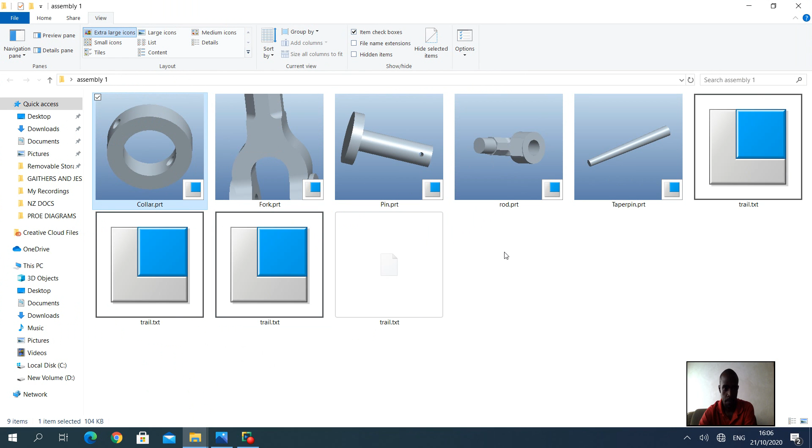We want to proceed with the final section of our machine assembly, the real machine assembly. What we actually covered before was part designing in machine assembly. I have made all the parts that make up my knuckle joint: the tapered pin, the rod, the pin, the fork, and the collar. They're going to be assembled together to make the knuckle joint.

So how are we going to be doing that? I'm going to be initializing my Proe together from scratch this time, because this is not going to be like what we did in part designing. Ignoring all the errors, you might be getting different errors to what I'm getting here, because I have not made my Proe the default software, but you can ignore them as long as you can open it.

So here we are not going to be doing part designing, we are going to be selecting assembly designing, checking the default template, selecting the last option, millimeters, like we did previously. Let me see. Yes, this one, ASM, that's for assembly, millimeters right there, and that's it.

So you are welcome to a similar window to what we had, but this is now machine assembly. You can also make parts in assembly, which is the top-down approach, but I'm going to be doing the bottom-up approach, whereby I've already made the parts previously. I just want to be able to combine or put them together using machine assembly concepts.

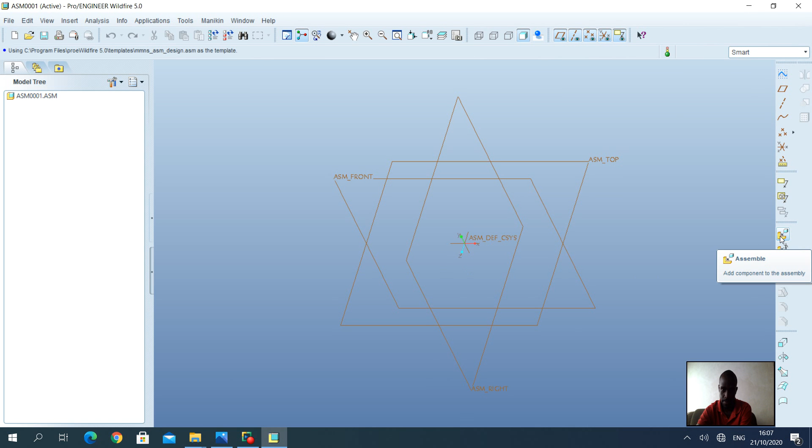The main tool we're going to be using is assemble, which is adding components into the assembly. I'm going to be selecting this to import the parts, going into my desktop and assembly 1. What am I going to start with? I think I'll start with the fork, then import the rod, then the pin, then the collar, and lastly the tapered pin.

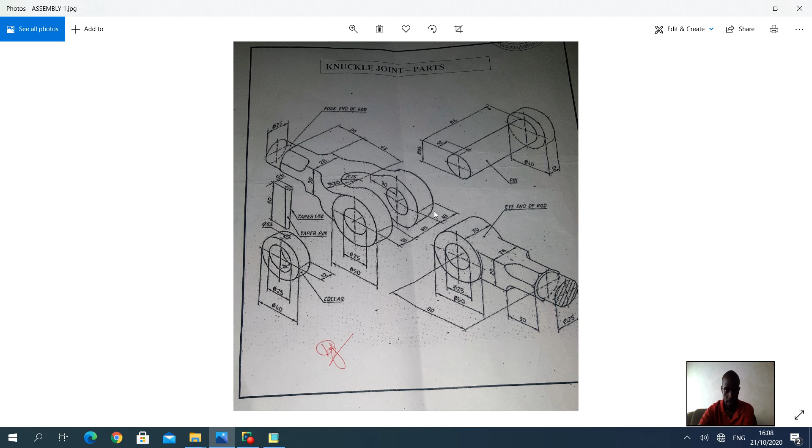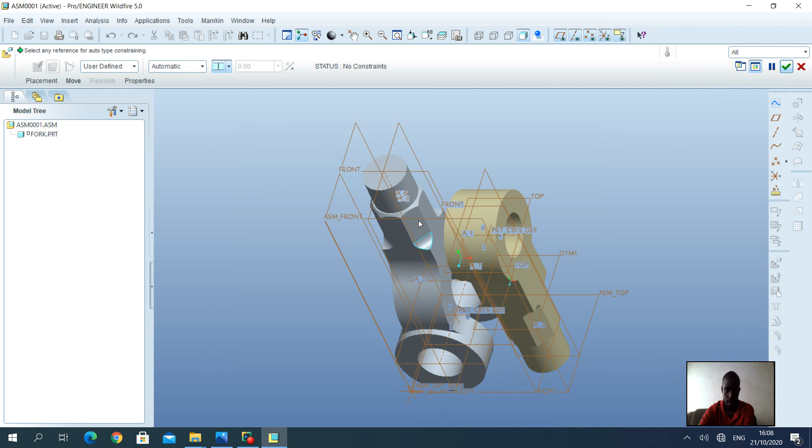So let me first import the fork into the assembly. The fork has been selected right there. I'm going to click done. Let me put another component, which is the rod. Where is the rod? There is the rod.

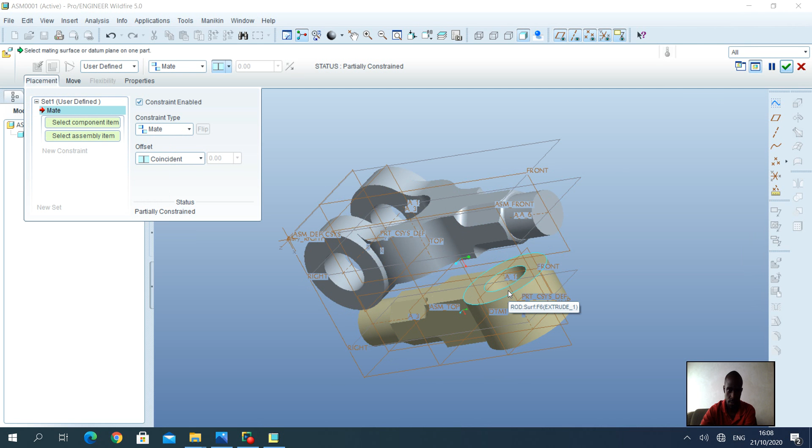But now I want to make sure that it is inserted into this assembly, so I am going to add some constraints. First of all, let me try to use the mate. The mate is joining two surfaces or faces together. I'm going to join this surface to that surface, yes, in that manner. Then I'm going to create another new constraint.

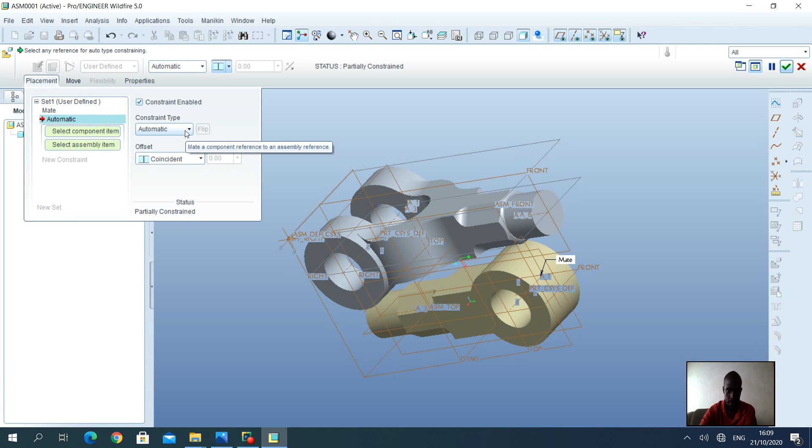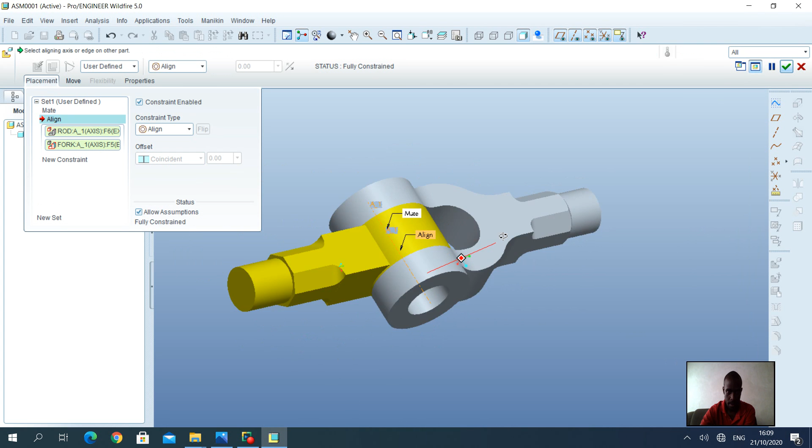This time it will be the align. Let me try to align these two components, or when we're aligning, we are putting two axes together, aligning different axes. So this axis to that axis. Yes, it has been properly aligned as expected. So I am done with the first part right there. Then I can click done. Okay, it's properly done, that's good.

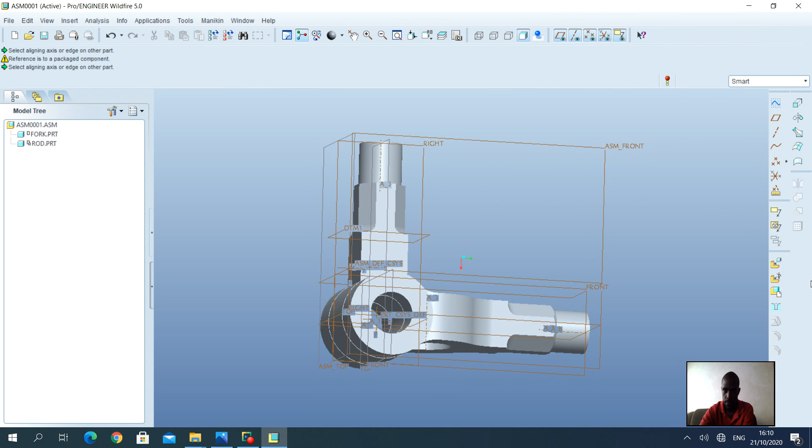So far so good. What are we going to be importing now? I think we're going to be importing the pin. So let's make the pin, let's import the pin into the assembly.

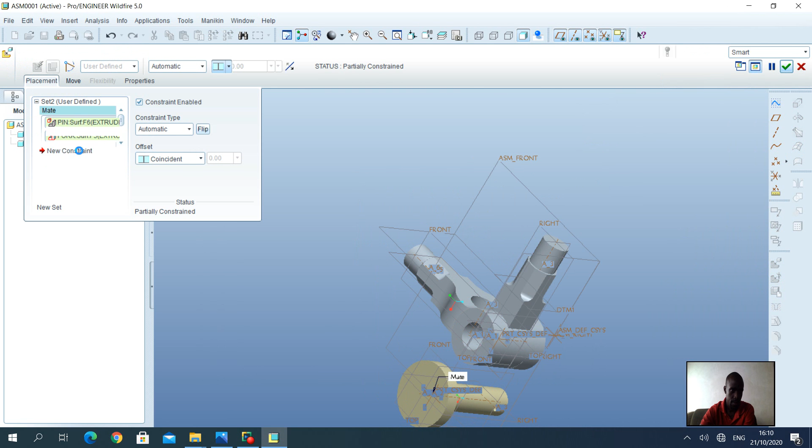So there is the pin. Let me try to mate this surface to this surface. Let me create a new constraint, which is the aligning. So whenever we're mating the surfaces, let me try to align these axes together. Yes, it has been inserted perfectly well, and that's it, we're done. We now need to import the collar.

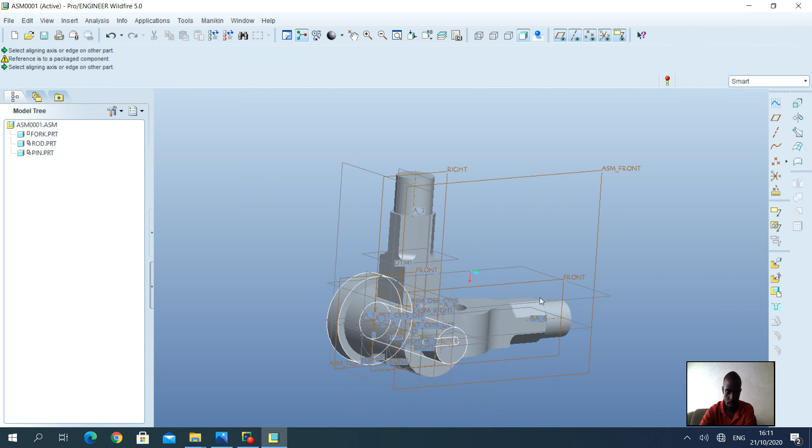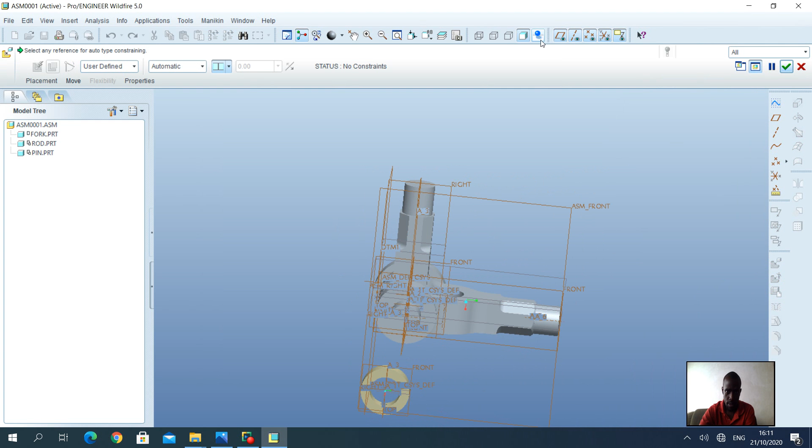Let's import the collar. So there is the collar. How are we going to be importing it? Let me check the axis. Let me try to turn off these planes because it's now less visible, for better clarity.

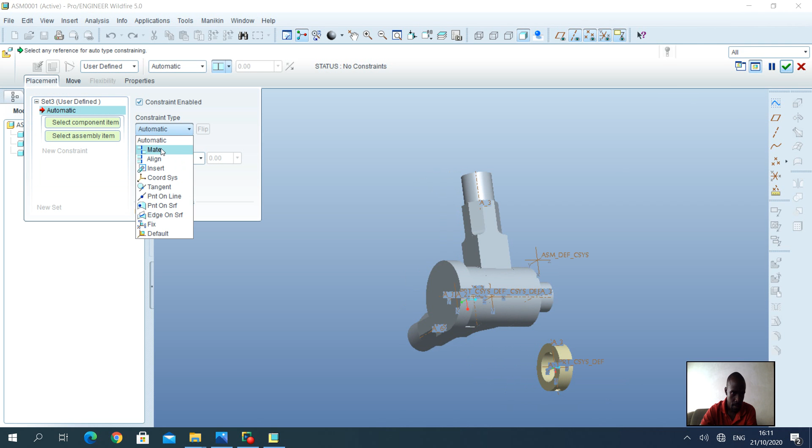So I am going to mate this surface. Let me make a constraint which is mate, this surface to this surface, and then create a new constraint, align. Mate and align, very important, to this axis right here. So that's it, but we don't have a through hole here.

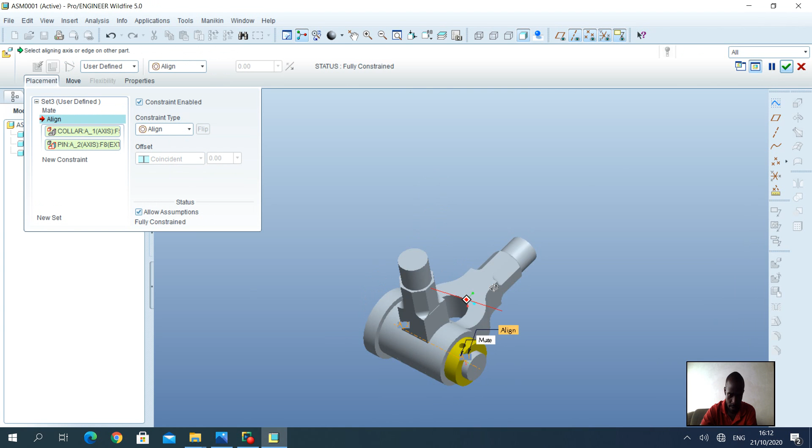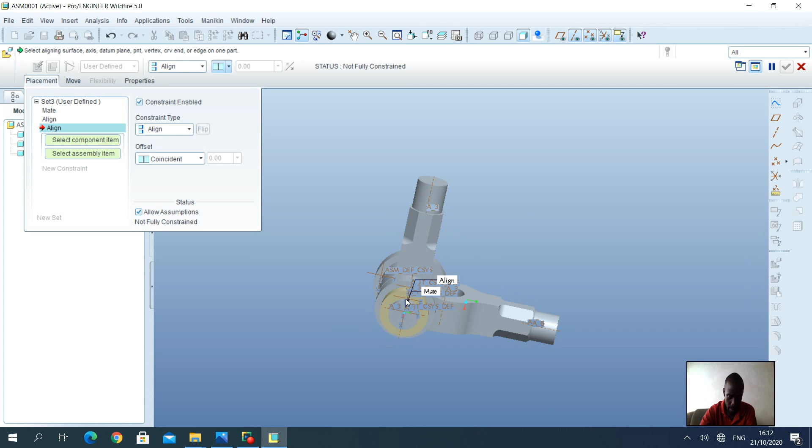So let me try to create another new constraint, which is align. I am going to be aligning A3 to this part. Yes, and now we've got a through hole. I think it has been done perfectly. Let me try to visualize if I have a through hole.

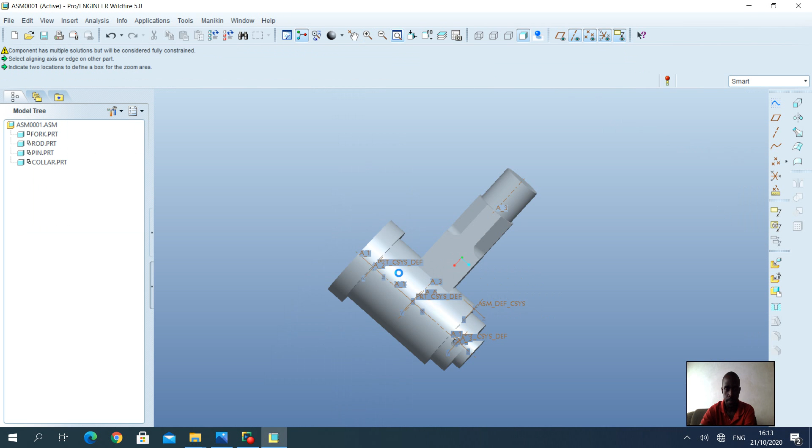Yes, I have got a through hole right there. Now the last thing is to insert the rod inside this hole, the tapered rod, the tapered pin actually. So let me see how best to insert it. I'm going to select another option, which is insert, and select the revolved surface which has been made previously, into this hole.

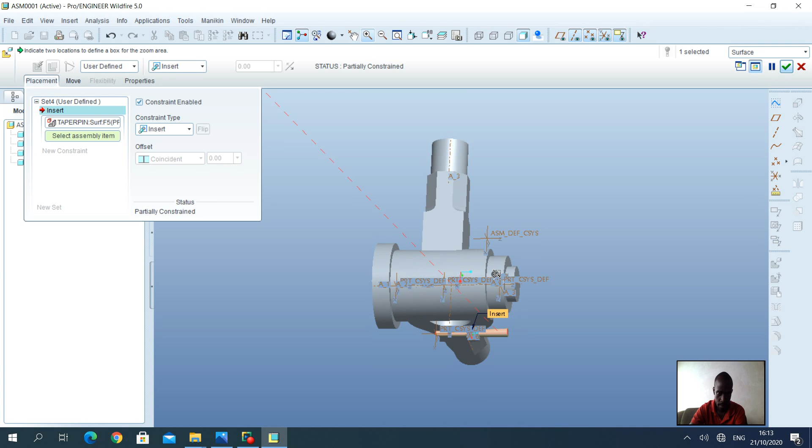Let me zoom into the hole. Yes, and it has been inserted. If I click OK, let me see if it has been done properly. Yes, it has been inserted properly.

So that's it, ladies and gentlemen. I'll click done. If you want, you can save your assembly. Save a copy, as assembly. Assembly 1, assembly 1.

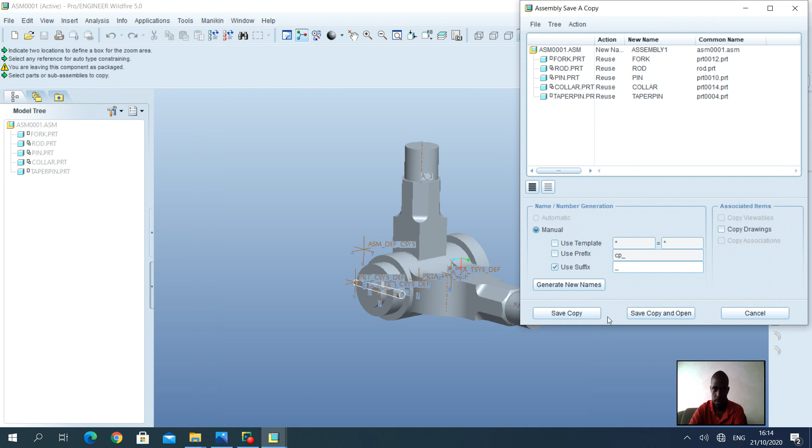Then I'm happy with it. So these are all the parts. Save a copy, then that's it. So your assembly is made up of the fork, the rod, the pin, the collar, and the tapered pin.

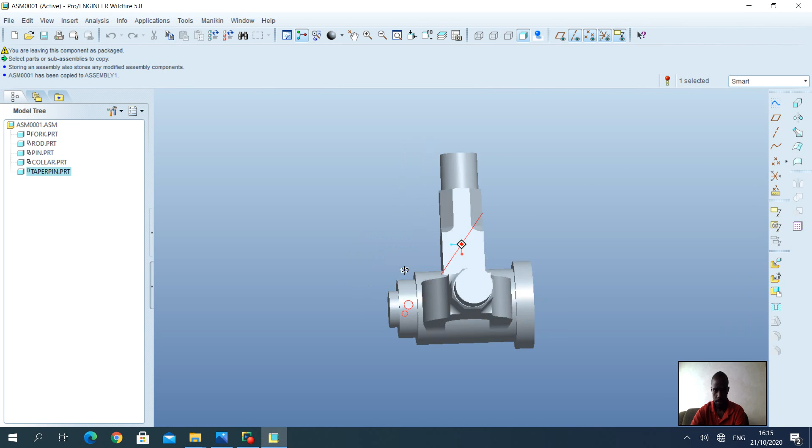So very clear and very straightforward. You can build up a whole machine using this concept we've done. No matter how big it is, you can build an assembly using these tools. Mainly I use the mate, I use the mate, and I use the align, and I use the insert to insert components into all of the features.

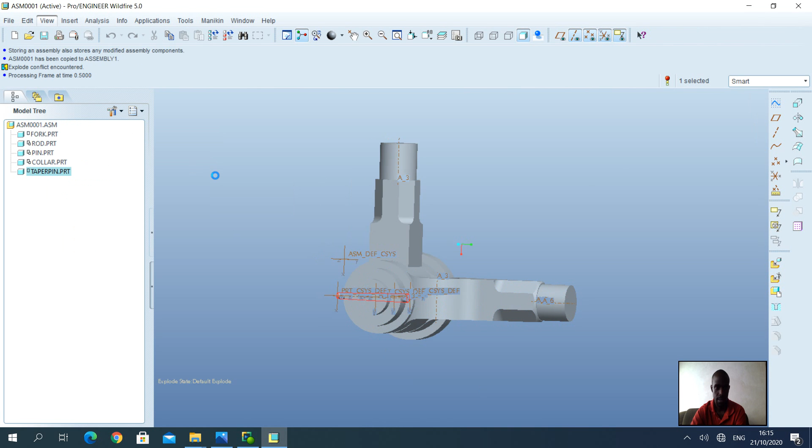So that's it. But before I close, let me also show you how we can create an exploded view. Let me go to views, explode, and let me try to do this default one. Let's see what's happened. Yeah, so that's how you can make an exploded view of the component.

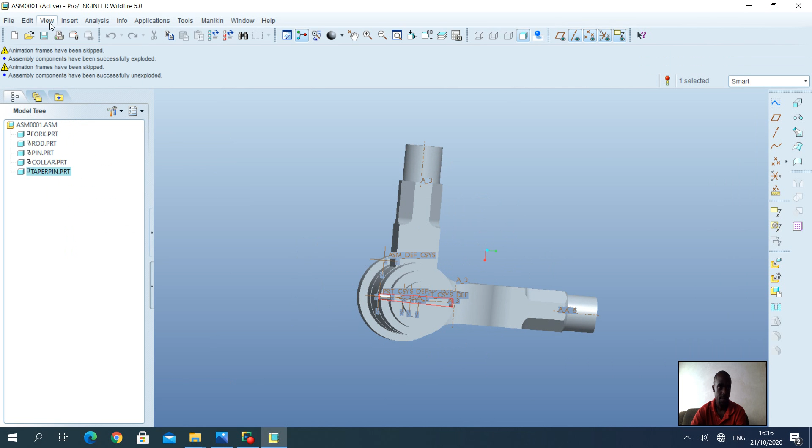Once you have done that, you can create an exploded view, and if you want, we can create it in that manner, and that's it. So that's how you can also make an exploded view. If you want to make your own movements in the exploded view, you can edit the positions yourself, and show how these components can be exploded in a manner that you want.

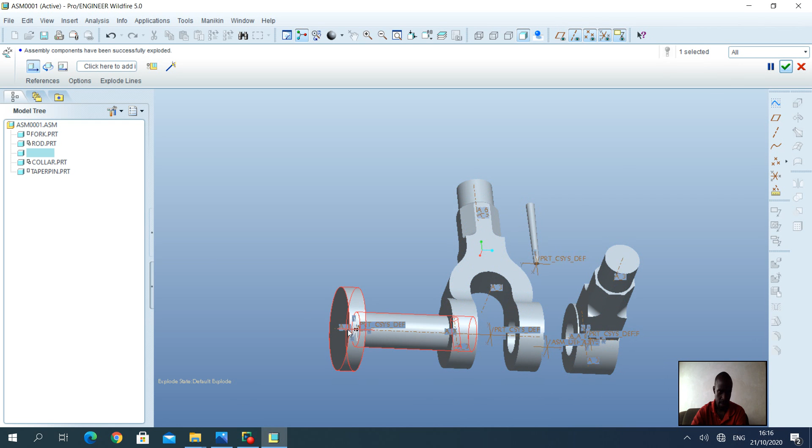Yes, you can also make this pin, selecting this axis, moving it further. You can also select the fork. Let's try to move it even further. Alright, no problem, let's put it there. Let's click done, and then let's create and explode. Then right back we can explode again in the manner that we want. So that's it, you can also make those exploded views in CAD.

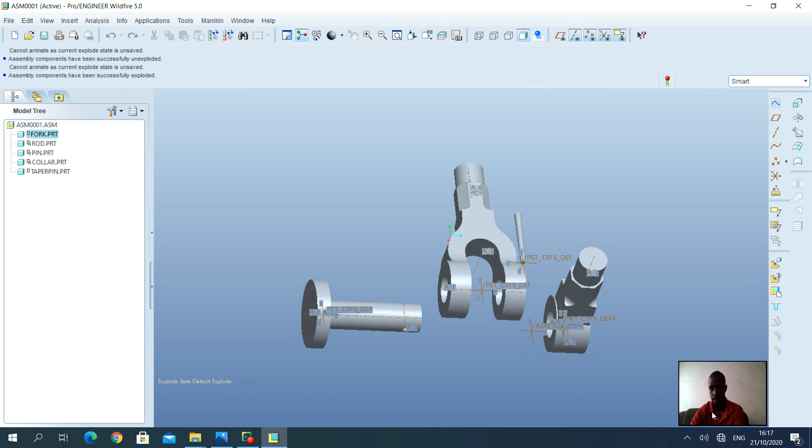So that is it, ladies and gentlemen. I hope you've appreciated how to use the assembling tools to assemble a machine. Let me meet you in the next video, where we are going to be talking about more options in advanced modeling tools. See you there.